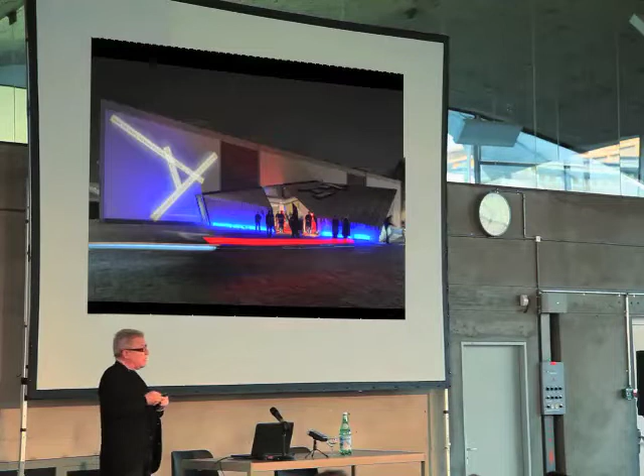By the way, I was able to imprint on this museum a quote in 3 languages. It was written in Arabic first, then Judeo-Arabic, and then I put it also in English and in German—a quote I found in Maimonides, Moses Maimonides. He wrote it about 1,000 years ago, a Jewish philosopher who lived in Spain, in Egypt, in Morocco. He wrote some very, very interesting books. But this sentence: hear the truth, whoever speaks it. It's also about ambiguity—what does this statement mean? Hear the truth, whoever speaks it. The speaker is to hear the truth, or hear the truth, whoever speaks it—whoever, the foreigner, the other, the exile, the immigrant.

Anyway, I'm glad the Jewish Museum permitted me to put this work, which I produced just for that. It's in Kreuzberg, mostly a Turkish neighborhood, with a lot more immigrants now than before. So a museum moves forward. This idea of a Jewish museum—now Germany will have 3 million immigrants, people coming, escaping from Syria. So it's important that one understands this out-of-jointness also as coming together in this place.

I had another chance to win a competition in Germany, which I called Fault Lines—a competition for the Military History Museum of Germany, in Dresden. What does it mean to build a military history museum in Germany? That's the question. What do you do in such a project? You all know, many of you have been to Dresden. It was considered, and still is, one of the most beautiful Baroque cities in Europe, with amazing architecture, amazing works—shown in paintings of Bellotto and so on, one of the great artistic capitals of the world.

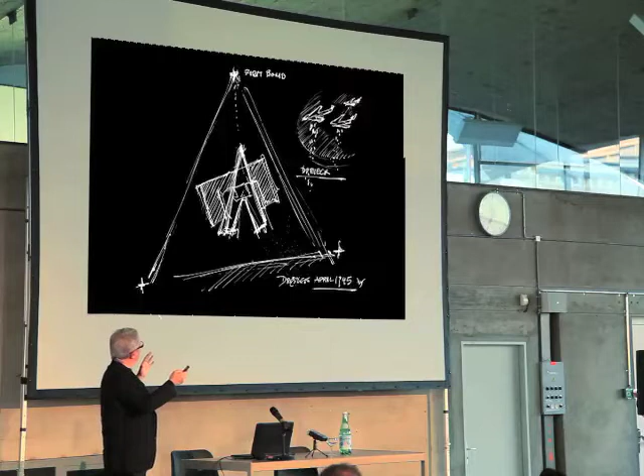The museum is a kind of an arrow, a vector sitting in an old armory. It is a self-similar form to the three points from which Dresden was bombed in the Allied bombings. It's the largest museum in Germany.

You should not be surprised. German military history is big. It's by far the largest museum in Germany. The armory was built at the end of the 19th century and was already used as a museum in the 1890s. Then it continually served as a museum of different governments: the Saxon government, the Kaiser, the Nazis, the Soviets, East Germany.

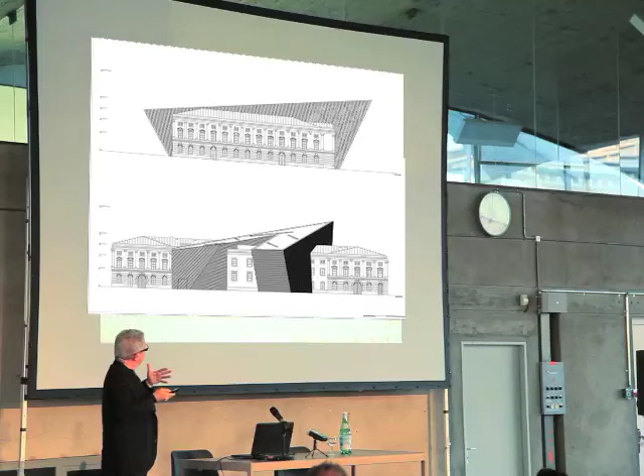After the fall of the wall, the question was, what do we do with this building? How does German history go on in a new Germany? So I inserted a completely new form into this, and I restored the armory. The armory is a protected building, but I didn't damage it in any way. I just cut it in a very delicate way and put in really a new space.

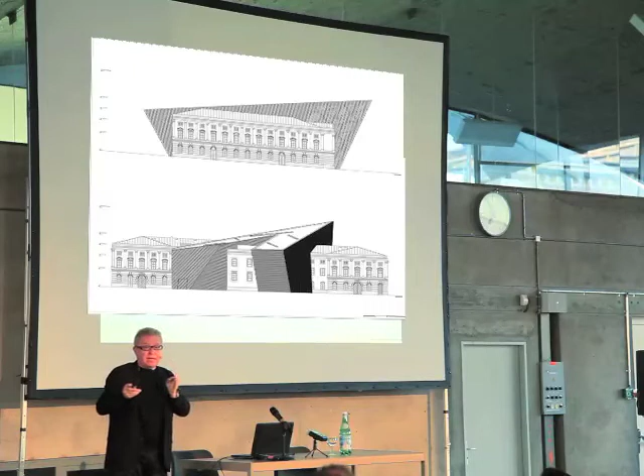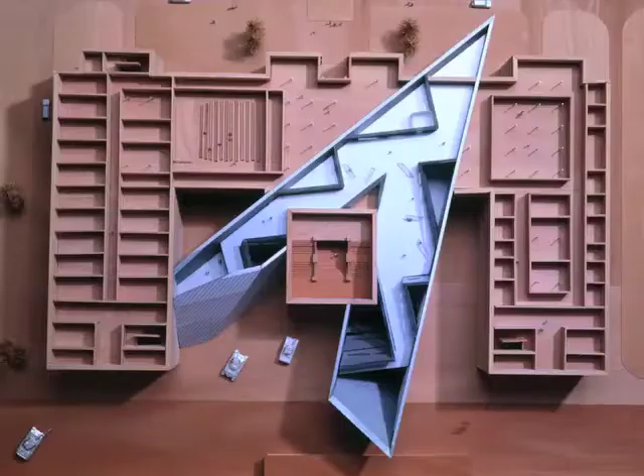The story is told chronologically from Teutonic Knights all the way to today's German involvement in Afghanistan, NATO, or whatever. But this horizontal history is disrupted by the wedge, which peeks out of the building itself, exactly between 1914 and 1945 — I think the years which brought the worst of militarism and evils from Germany. So it interrupts it, and then you continue on your way in the horizontal.

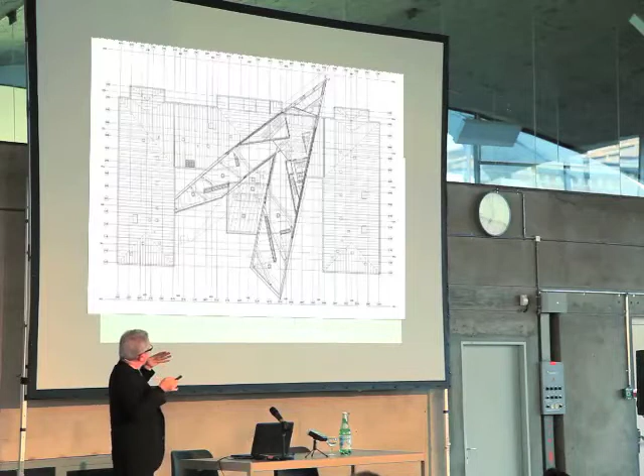So, horizontal and vertical structure. You can see here how it is very peculiarly and very precisely lodged in this system of construction. Of course, it has to incorporate...

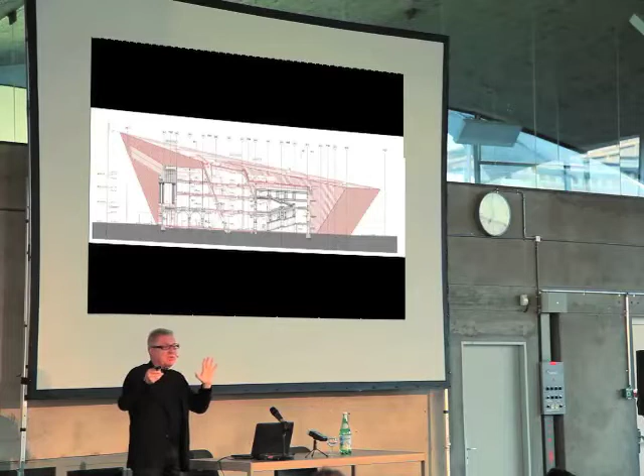...all the significant elements of the grand stair of the 19th century. It was very badly treated by the East Germans — it was really kind of a ruin, just patched up with kitschy motifs, bad lighting. They took away some of the capitals of the columns. So I tried to restore it — I wouldn't say lovingly, but restore it so that you could see the contrast between what that armory was built for and what the museum is today.

It's the space that is pushing through, and on the interior, I restored the old arches, and then the arches are cut — cut by this completely different structure, which is concrete.

It's leaning, it's complex. And I like that the exhibition designers have a running text of Clausewitz, that war is politics conducted by other means. It's really a meditation on violence and on war.

I have to say, only in Germany could I build a military history museum which comes close to talking about peace, because I've been to military museums — I built one in England, and there are military museums in America and France. They're all about forward, forward, forward, forward.

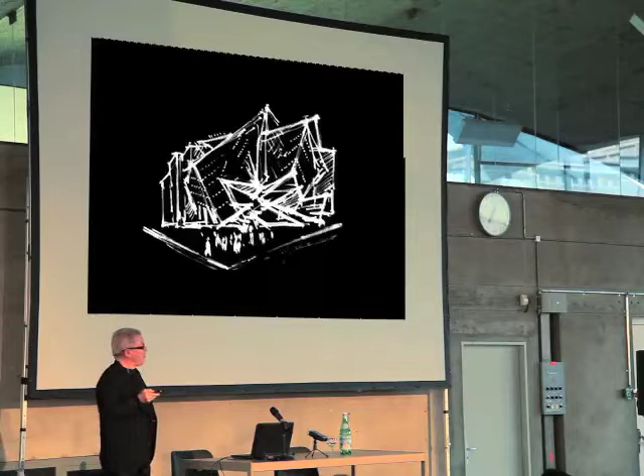Okay, something on a very different level. Another museum, which I was lucky to win in a competition, in one of my favorite cities, Toronto. Nina, my wife, comes from Toronto. We live there.

It's a museum that's built. It's called the Royal Ontario Museum. It's the largest museum in Canada. It has both a natural history museum and an art museum, like the Metropolitan in New York, both in one, built in the late 1800s, early 20th century.

And you can see this crystalline form. Really, I was inspired, I have to say truly, by a little crystal that I saw there. And I do love crystals. I do agree with Frank Lloyd Wright, who said that if a building is not a crystal, it's not a good building. So I agree with this master of mine.

So it's a major public institution. I had to reorient it. The main entrance used to be on University Avenue, this big avenue, which is now more like a traffic artery. I reoriented it to Bloor Street, the main street, like the Fifth Avenue.

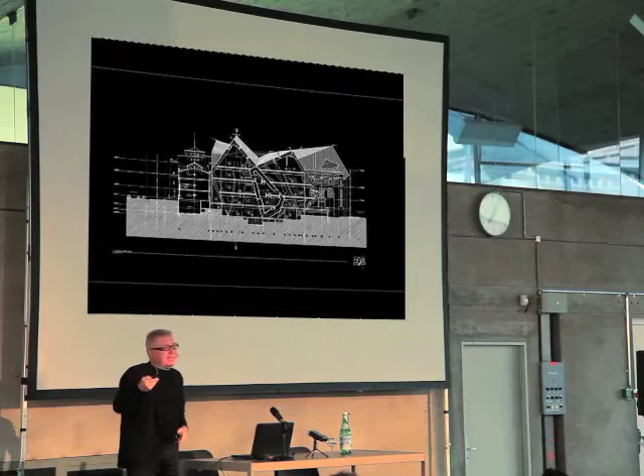And it's a complex weave of buildings. You can see that I don't like just doing facades - it's not nice to do a nice facade and behind it have a cube or something. To me, it's nice that the whole space is out of joint as well, going in a different direction. It originates from that small crystal on the inside, which is a kind of central crystal giving birth to 5 different structures that have the different galleries and different exhibits.

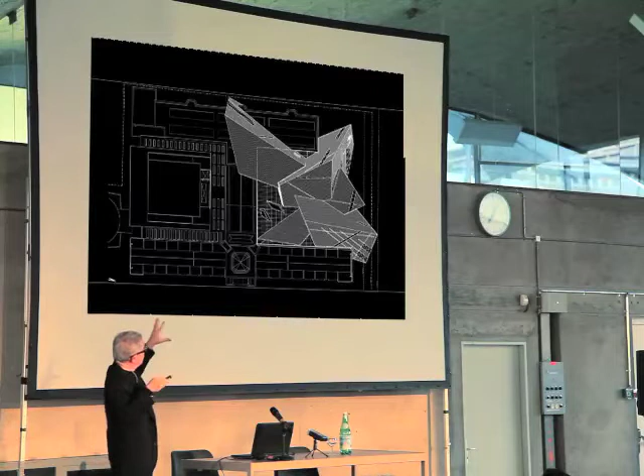It's inserted into a historical building without camouflaging that it is a completely new building. You can see it in the roof plan - there's a restaurant, different galleries, main stairs, main access points. And it created also a kind of a new sense of urbanity on the street itself.

The crystals are also used to deflect light in different ways because Toronto is north, so you want interesting light in the building, and very large-scale vitrines into which you can see at night the mega collections of dinosaurs—one of the best collections of dinosaurs in the world. It's fantastic to have a building with dinosaurs at the entrance, and these linear slots, these small windows, relate to dinosaurs, to ancient things in the museum.

The museum is connected to its old fabric through a court that I created, which is also one of the major public spaces in Toronto for the film festival and social events. There are bridges across that central crystal, and large temporary art galleries that are very flexible.

And there's a contemporary art center, and a fantastic restaurant, very popular with the public of Toronto, right across from the new music school. So it's a building that does many different spatial things that have to do with the program of the building.

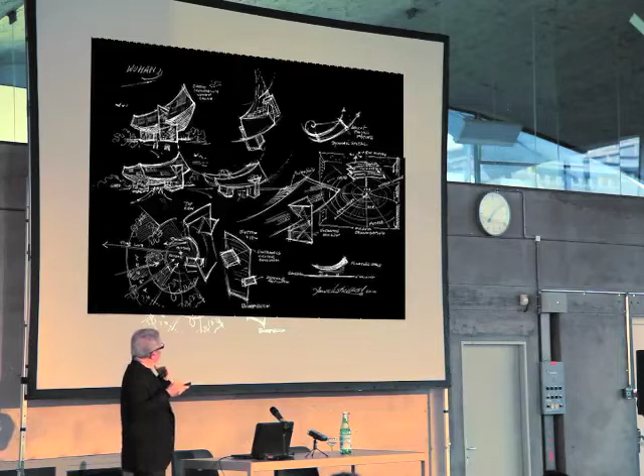So I thought of a building that could deal with history, that could refer to many things in Wuhan that are not so obvious, the mythology of Wuhan, and a building that would preserve at least that large wing of industrial works you see, in a completely new area of development.

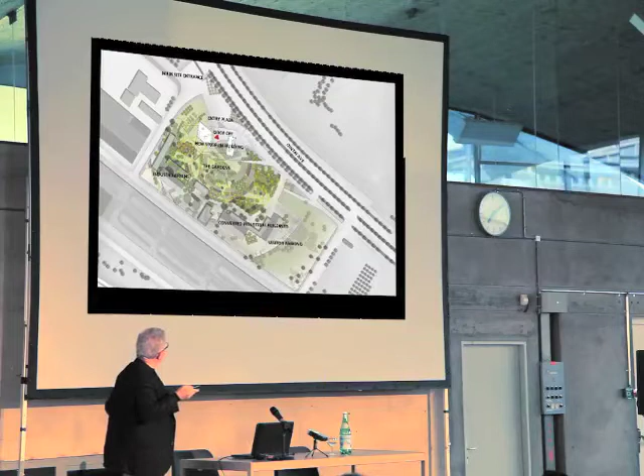So there it is—creating a big kind of public space, converting the industrial buildings, and then creating a massive building. It's a very large building, like everything else in China. It's large, but lifted up so that the surroundings are really visible, with great panoramic windows that allow you to view that area.

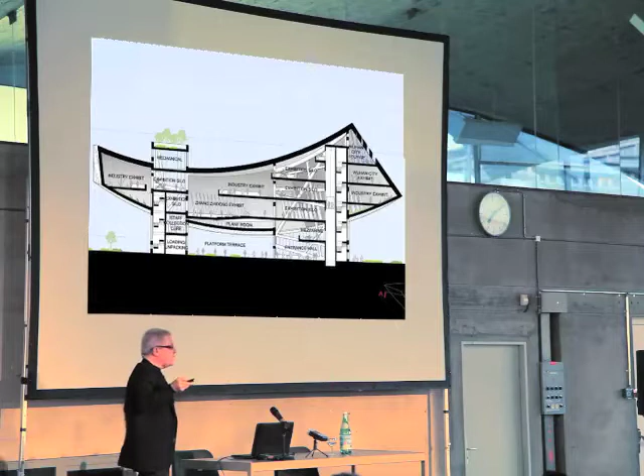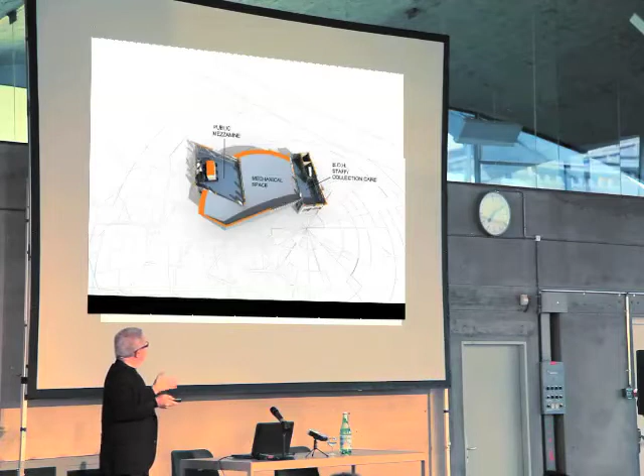It's really different exhibitions—the Zhang Zhidong exhibition, the industrial exhibition, the Wuhan exhibition. The silos that support the structure themselves have different kinds of collections, so it has a very light footprint. I think maybe it's the heaviest building ever built on the smallest two legs, which provide the theaters of exhibition, the silo of exhibitions, the Wuhan exhibition itself, the lounge, the terrace, the restaurants, and so on. It's currently under construction.

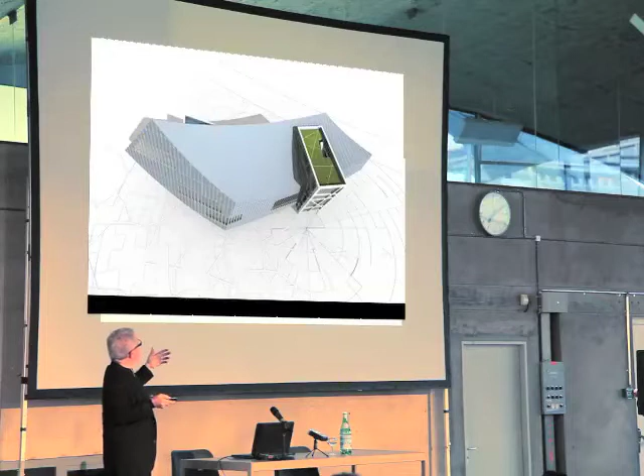I have to tell you, it's not very easy to build a building in China. A lot of my colleagues, famous architects, have built buildings which look great in photographs, but when you go 2-3 years later, they're falling apart. So I asked if we could build a mock-up to test, and they said nobody ever asked us to do it. I had a good client who agreed to do it because it cost some money.

The first mock-up, I cannot tell you, it was incredible. Nothing aligned. To make a sustainable building, a building should not fall apart, number one, right? It should hold together, the glue should hold together, the materials should really link and stay fixed and stable. It wasn't that. Second, I asked them to do a second one.

It was a little bit better. And I understood because the workforce in China is from the countryside. They have never done anything like that. So it's very difficult, it's a challenge to do.

And my challenge here is to build a sustainable building, one that really operates with low energy, has very good construction methods, is exciting to the public, works for the client, works for the exhibits, and will certainly change this area. It's a very exciting project.

It will take still more time to build it. I don't have very good photographs, but you can see the scale, you can see the power of Chinese cities rising. It's a challenge. Okay, metamorphosis.

That's in a place that I love, and I also live partly in Milan, where we did a competition. I was on a team with Generali. There are many — I think every architect that I know was in this competition. But we entered together: myself, Zaha Hadid, Arata Isozaki, and Generali, the insurance company. And we were lucky to win.

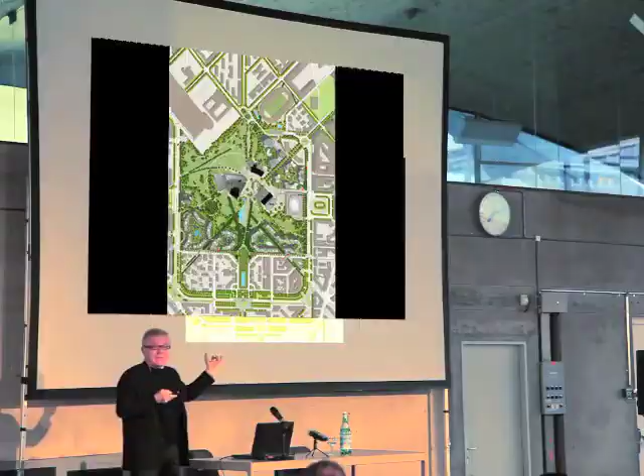I did the master plan. It's in the center of Milan, where the Fiera di Milano used to be — they moved out to the suburbs. The idea was to really turn the space into a green piazza at the center, connected to the Metropolitana, build housing, and really pick up the scale of housing on the periphery of the site.

In the center, build large-scale office buildings — there are 3 of them — retail and so on. Preserve the old hall, and really develop the area in a sustainable way, which is new.

At the center stand the 3 towers. Isozaki's tower on the right is finished. Zaha's tower on the left is under construction. My tower in the center is just beginning. So that's kind of the center of the open public space.

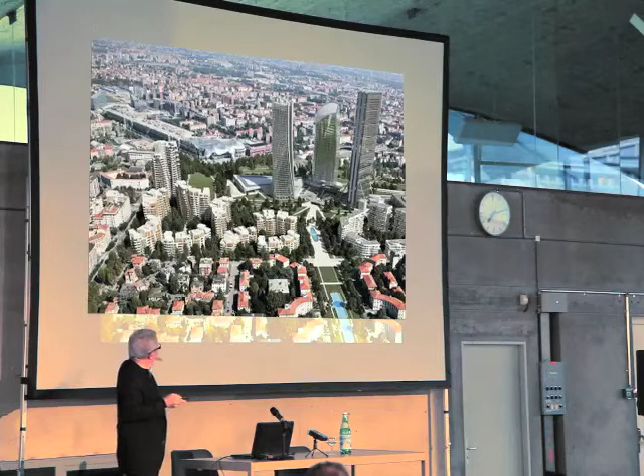It's really about creating a three-dimensional sense of work in this exciting new and old place. But it's also about how to bring the old 19th century scale of Milan — you see on the left, where my project is — how to bring lower scale buildings and make them higher towards the park, creating a sense of community in a very, very high density project.

It's a very, very high density — buildings are very, very large. So how do you break up the scale of the buildings? How do you create good apartments which are economically viable, have the same floor plate, but give expression in terms of extensive terracing, large-scale open areas that can be used for dining and for parties and so on. That's really the vehicle I used, screening the building in different ways.

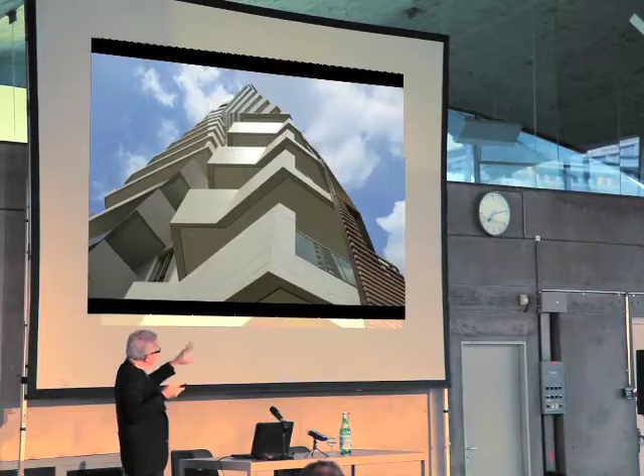I think it's the biggest challenge to create interesting housing, because it's economically driven, it's technically driven, and yet how do you provide individuality for the large number of people — thousands — who will live there? So I created this garden. By the way, you can access underground with your car to the core of the building.

It's massive, it's very, very large. It has many buildings with good views, interesting places to live, and spaces that don't exist in Milan because the floor plates are very different. Light is different, the technology is different, amenities are different, the way it's constructed is different.

So it's a technical building, but again, it's more vertical — I broke this large horizontal theme into verticality, and I think it looks good even with these beautiful Art Nouveau villas. It's certainly rising, and the site is going to be completed in a few years. I think it will really be a new living, working, recreational center in the center of Milan.

Another project which is close to my heart, because I was born in Poland — and that's a contradiction, because I was born under a real communist government, and now Poland is free, and I speak the language, and I see the change of the country. I made this.

What do you do to build a residential tower across from the palace I saw as a kid - the Stalin Palace of Culture, the most misuse of language I've ever seen - a palace of culture built by Stalin to oppress the people. But I had a chance to build really the tallest residential tower in Europe.

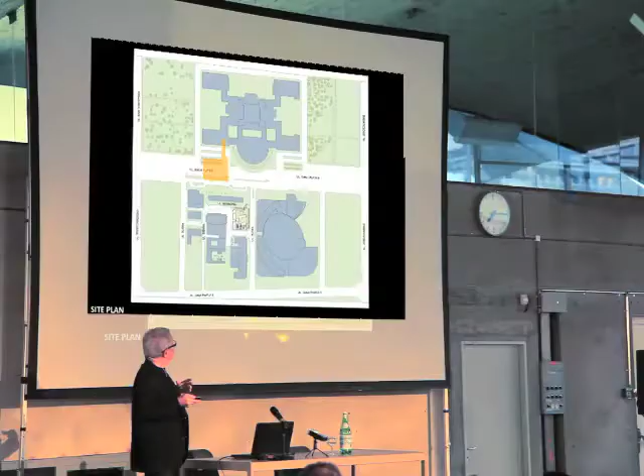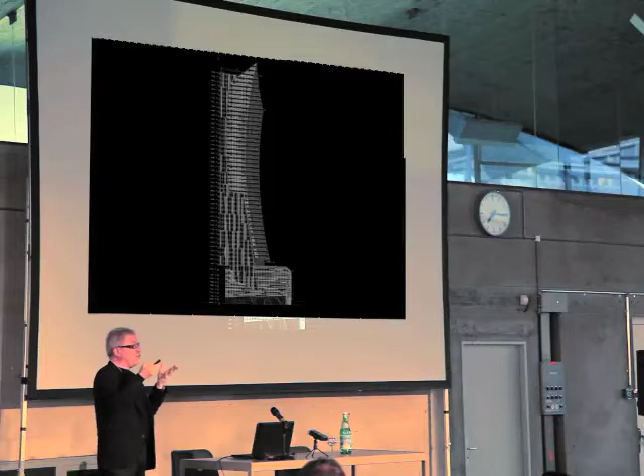Now, of course, to create an interesting residential tower that has some meaning, you could just extrude a simple tower, give it a nice color, use good materials, make it sustainable. But I wanted to express in this tower a kind of movement away and towards the center of the city, and to affirm that the center of the city is not only public - it should also be for people to live, not only for the exercise of ideology.

You can see that building is also cantilevered. The building is offset from its base. The base is retail, but it's slightly offset - you can see it here.

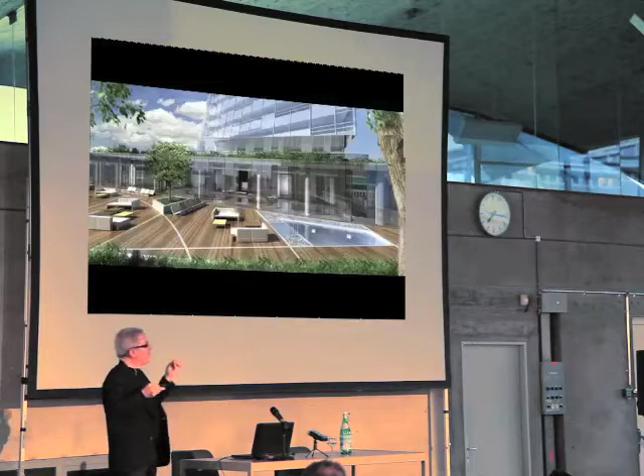It's turned in different directions to take advantage of the fantastic, beautiful Warsaw, which is a city of great culture and great beauty. And you design from inside out, from residential requirements, residential apartments, and the requirements of the client, to create good retail, good amenities, and views, of course, in such a high tower.

The tower is almost complete. It was not that easy to build. Again, Poland has great workmanship, great workers, but to build the first large-scale residential tower in the center of the city is a challenge. And it's a dialogue - you can see it's a dialogue.

It has to do with my own childhood. I have photographs - I'm standing in front of that palace with my sister. And that's the only place you'd take a photograph, because it's like the only thing visible. The rest was just rubble.

But it is a building that has really become part of Warsaw. I think it will be an elegant building when it's finished, with interiors well constructed. And I think it will say something else - it will say we should have high density living for people in the center of the city.

Don't develop the city with low-rise, three-story houses out into the countryside, built where the emptiness was created, particularly after the tragedies of World War II. And don't be afraid. Right now we have hotels and office buildings, but residential, I think, is the key to a good city - having people live in the center of the city.

My favorite smallest project - because I never did a small project. I realized I started with a big project and never had a chance to do a house. And all architects say the best thing to do is a house, and I agree with them. So I had a chance to do a small house for a couple in Connecticut.

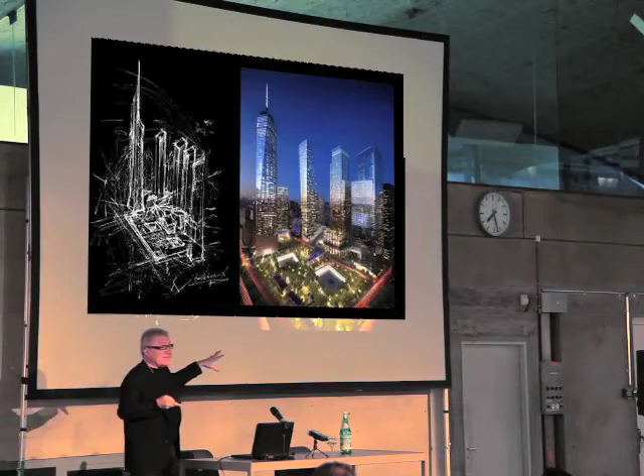That's my drawing, my sketch from long ago—kind of a quick sketch, distributing the buildings, empty, the site, footprints, towers—and one of the latest perspectives. Pretty close. And you know, it's not about building a building. A lot of people say, you know, you compromised, the building doesn't look like that. It's much harder to build a neighborhood than to build a building and to make it come as you really want it to, given how many complex partners there are.

And it is really just like that. There is the Hudson River, there is the site, there is the circle that I drew—the circle of buildings standing in the grid but on the periphery. Ground zero at the center, the memorial with the footprints, and that arrow, the wedge of light, and additional public space which I created, which I'll explain in a minute.

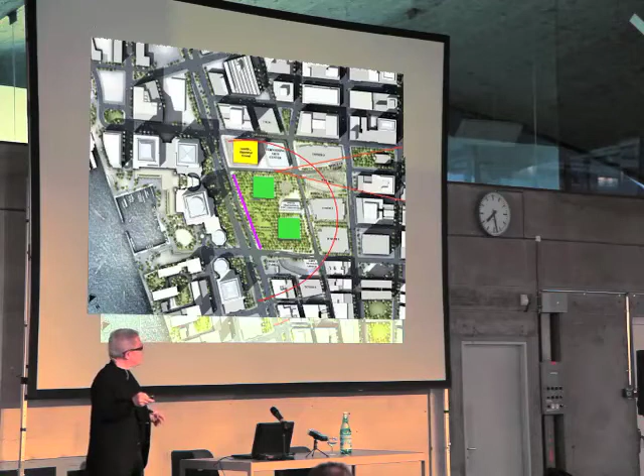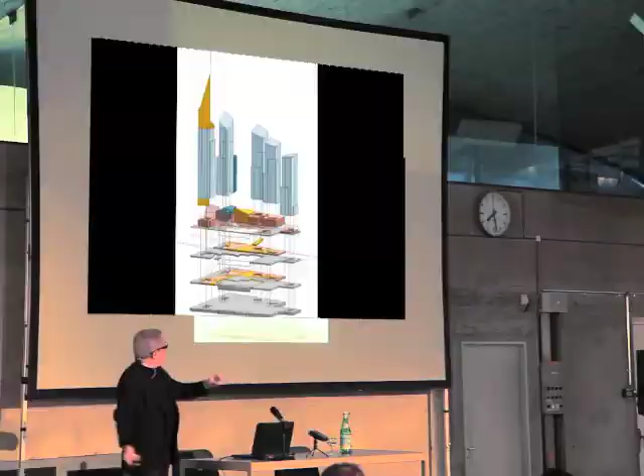But I show this diagram because what is most important is what's underground. There's 75 feet underground of levels. Trains—maybe five days after the attacks—between New Jersey and New York were running, in this devastation. It's the lifeblood of New York, the work. So what you have to plan for is all the foundations, all the security, all the constructability of the whole project at the very beginning. And you don't see the results.

Now it's what, 14 years after the attacks, 12 years since I started working. But it's, you know, you have to have patience.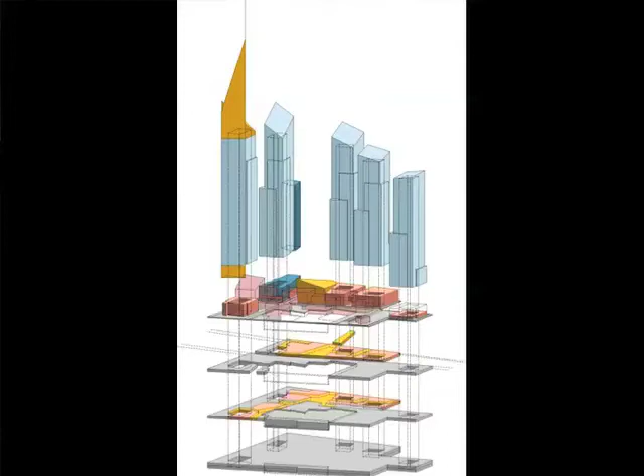And that was actually the slurry wall. I have to tell you, you descend through the visitor center, and I have to tell you this anecdote.

I was standing with the most famous architects in the world, my colleagues, at One Liberty Plaza, looking down at the site during the competition, on a rainy, gray November day. Somebody from the Port Authority of New York said, does anybody want to go to the site? All the architects were there, the 7 finalists, and everybody said no, it's much better to be here because we can see the whole site right from our window. But something said to me no, and Nina said no, I want to go.

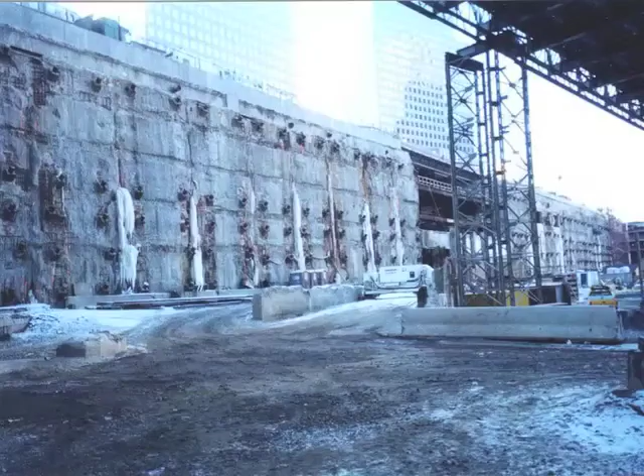I want to go to the site. It was the revelation of walking down, a very difficult walk, 75 feet down this ramp, mud, with this engineer. And when you stand there, all of New York disappears. You're so deep down, at the bedrock level where the towers collapsed. And I touched this wall, and the guy said to me, that's the slurry wall. Believe me, I studied architecture, but I had no idea what a slurry wall was.

He explained to me, it's a dam. On the other side is the Hudson River. This is a dam built to hold the waters of the Hudson River on the other side. And then I said, oh my God, I understand what the project is about. It's not at all what I was planning in Berlin.

I got a telephone, because I don't carry a telephone, but Nina always does. I called the studio, I think it was 2 o'clock at night. People were working on the project, and I said, forget all the things you've been doing, it's nonsense. I had a completely new idea that it should really be about this space. Jean-Lucien was there too, at 2 o'clock, even later. I had a kind of revelation about what it's about. It's about this site, this emptiness, this wall—not to have buildings there at all, push the building somewhere else.

And that's indeed what it is. The slurry wall is the underground, the museum is underground. By the way, it's a fantastic museum with millions of visitors. It's not a story of tragedy only, it's a story of heroes, people who did amazing things across the world during that time. It's a very moving wall. It's very hard, by the way, to preserve a living foundation—this is a foundation that supports ground zero.

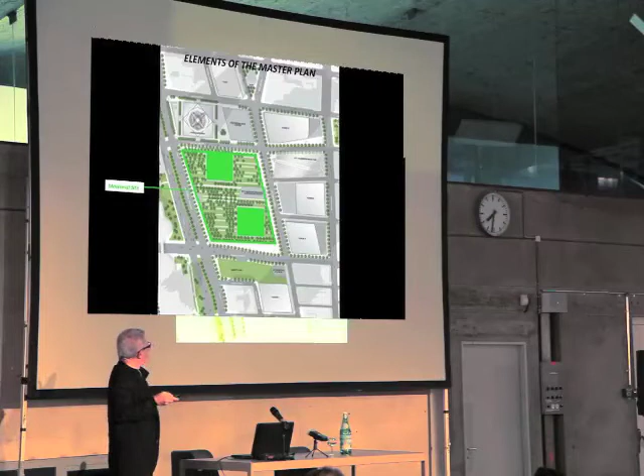The memorial site, of course, had to be a public space, the largest public space. There are 16 acres—the site is 16 acres, 8 acres is public space. It's very difficult with so much density: 10 million square feet of office space, 6 million square feet of other facilities, some 2 million of infrastructure. It's very difficult to have open space, but New York needs open space.

That's what architecture is about—it's about public space. And by the way, a beautiful memorial. When I proposed waterfalls in the competition, there was a headline, a front page in the New York Post, about the absurdity of Libeskind's ideas: how can you bring Niagara Falls to New York? That's a crazy thing, but it happened.

And they are very moving. In Michael Arad's design, they're very beautiful with the names carved. My idea was that the water is needed to screen the sound of the noise of New York, and also bring the sense of nature somehow into this very hardscape site. And it's a living site.

It's under construction. The PATH terminal is under construction. Tower number 1 is finished, people are moving in. Tower number 4 is finished by Maki, people are moving in. Tower number 3 is very visible. Tower number 2 will be starting very soon. So it's really underway.

I want to show you in this photograph, which I just took a couple of days ago, that the victory of this project is not to be counted by the forms of urban design. It's, to me, by the number of people who have moved to Lower Manhattan. When I came to Lower Manhattan, most of it was empty. People moved out to New Jersey, they left the country, many went away. Since I started working, 100,000 people have moved to Lower Manhattan. And that was my idea. It's a rebirth, an affirmation of life. Schools, families. It's no longer just Wall Street.

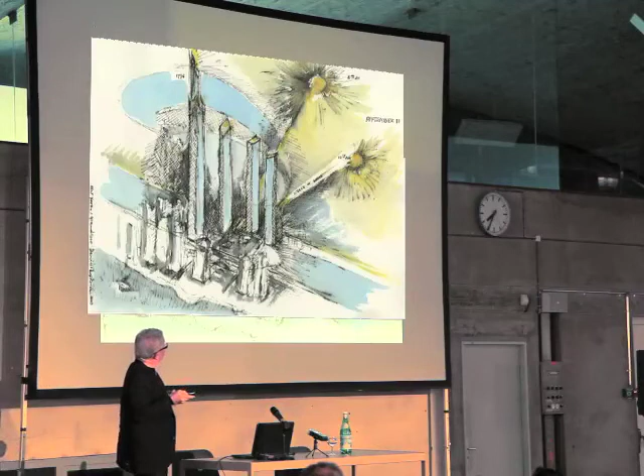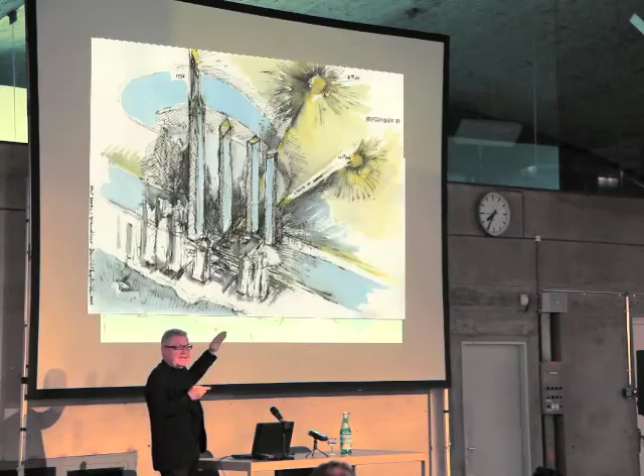I think this is very special. I took liberty during the competition to propose an extra public space, because there's not enough public space in New York - it's crowded with people. I call it the wedge of light, a space from Broadway defined by two hours: 8:46 a.m. when the first tower was struck, and 10:28 when the second tower collapsed, which is now the center of the PATH terminal mega skylight. So it's a kind of symbolic entry in the light of that beautiful morning.

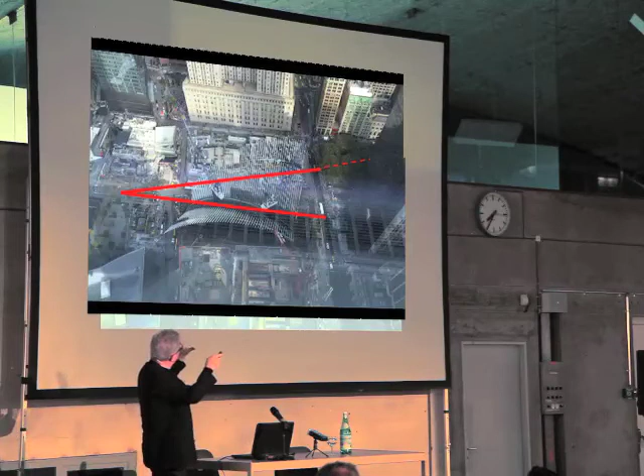I photographed this from tower number 4, from the roof, but it's distorted. You can see the foundation of tower number 2 on top. The southern foundation of the tower has that angle, and you can see the angle of the torqued PATH terminal of Calatrava as a kind of new gateway, which also embraces the dotted line toward St. Paul's Church, which is a very important part of the composition. As you look from ground zero towards Broadway, you see St. Paul's Church - a church where George Washington and the founders of America went to pray after his inauguration. It has a lot to do with the aftermath of 9/11.

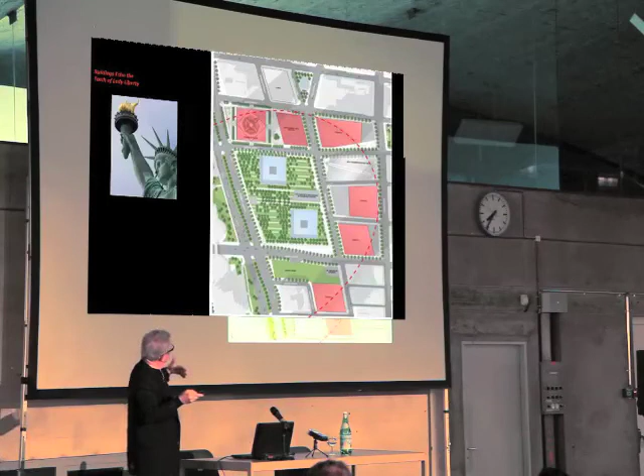So that's in the works. That will happen, I think, within the next years. And of course, the building stands in some sort of echo of the Torch of Liberty, which to me is very meaningful - there it is in construction. This is from maybe a year ago, but you can see where things are.

You can see tower number 1, you can see the wedge of light, you can see the footprints of the buildings standing within the grid, bringing the Greenwich Street through. You can see the visitor center, the footprints, the slurry wall, and so on. Here you can see pretty accurately from the air during construction: on the bottom, tower number 2 with an angle. You have the PATH terminal with its own angle. Tower number 1 on the right. Tower number 3, which is already much higher. Tower number 4, which is finished. Tower number 5, the church still to come.

So the new skyline of New York - but the new skyline is not really just what I thought about. It was really, you know, as I said, I was an immigrant, and I came by ship. I was one of the last immigrants to come by ship, because it was cheaper to fly later on.

Everybody flew into Kennedy, but being on a ship, being woken up at 5 o'clock in the morning, 4 o'clock in the morning, my sister and I standing on the deck - you're gonna see New York, and it's true. There's nothing to prepare you for the impact. When you're 13 years old, even if you've seen movies with New York, postcards or books, the impact of New York and of the Statue of Liberty, which later I found out has an inscription by Emma Lazarus, famous American Jewish poet, which says: 'Give me your poor, your tired masses who are yearning to be free. Give us the immigrants. Come to us, those who have no place.' That's what this project is about. It's about New York, it's about America, it's about the world, it's about freedom, it's about liberty, and it's about people. Thank you.